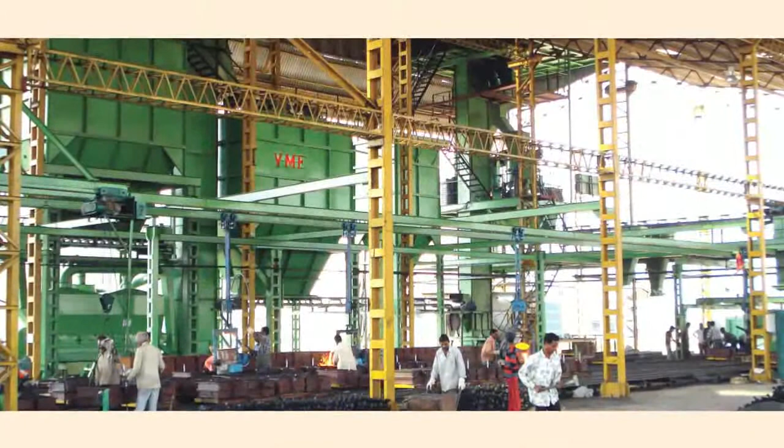VME offers integrated solutions tailored to the business and market requirements of our customers in foundry planning, foundry plant engineering, foundry machines, and shot blast systems.

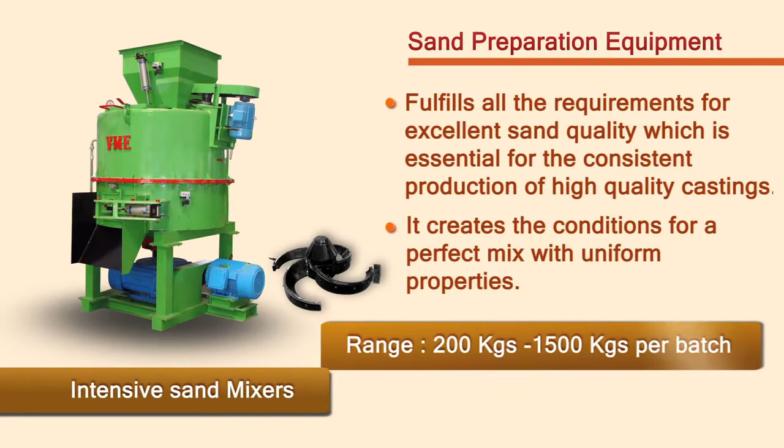VME sand preparation equipment. Intensive sand mixers fulfill all requirements for excellent sand quality, which is essential for the consistent production of high quality casting. It creates the conditions for a perfect mix with uniform properties, with capacities ranging from 200 kg to 1500 kg per batch.

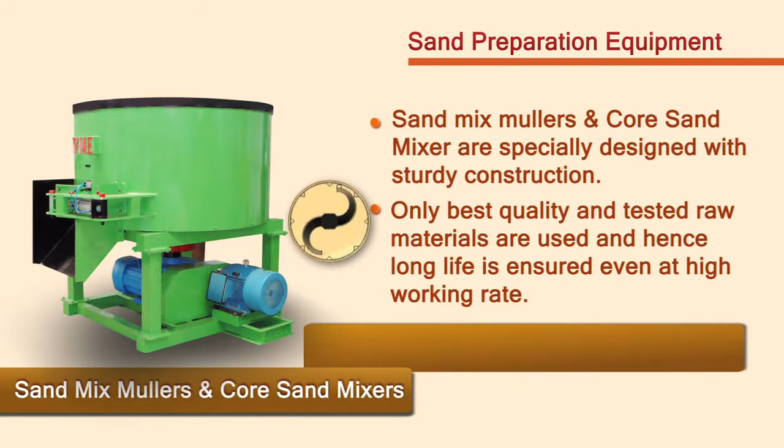Sand mix mullers and core sand mixers are specially designed with sturdy construction. Only best quality and tested raw materials are used, ensuring long life even at high working rate, with capacities ranging from 100 kg to 1500 kg per batch.

Fluidized bed cooler classifier. VME fluidized bed cooler classifier employs a unique fluid bed technology to cool green sand, ensuring dust-free constant temperature of return sand, ranging from 10 ton to 60 tons per hour.

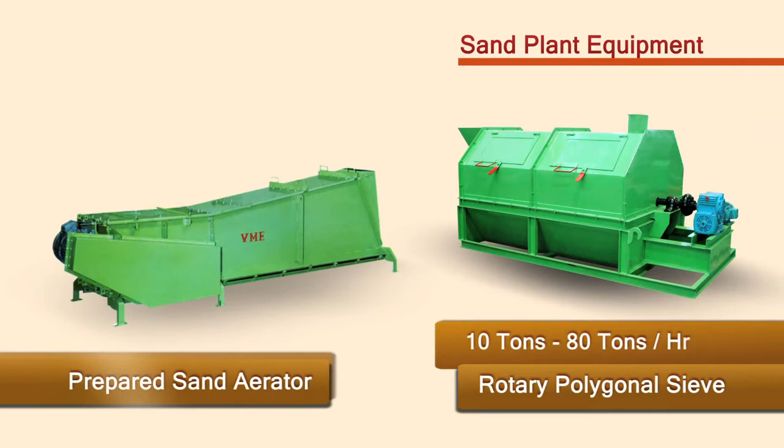Sand dryer, ranging from 1 ton to 5 tons per hour. VME sand plant equipment rotary polygonal sieve, ranging from 10 ton to 80 tons per hour.

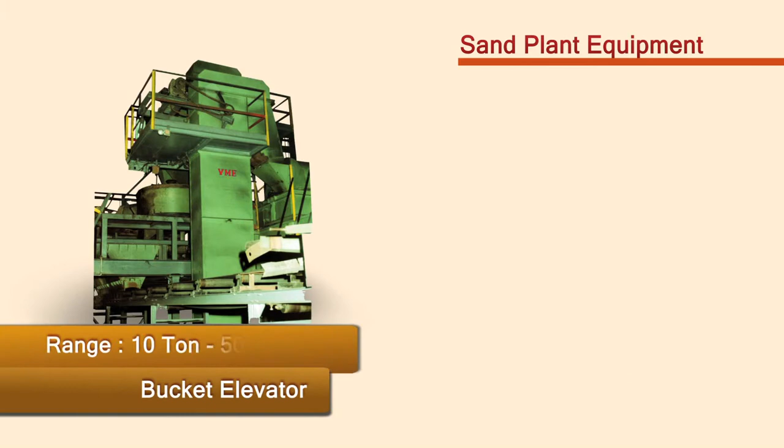Prepared sand aerator. Belt conveyors feeding to sand supply unit. Return sand disintegrator.

Bucket elevator for customized solutions, ranging from 10 ton to 50 tons per hour. Vibratory conveyor, ranging from 10 ton to 50 tons per hour.

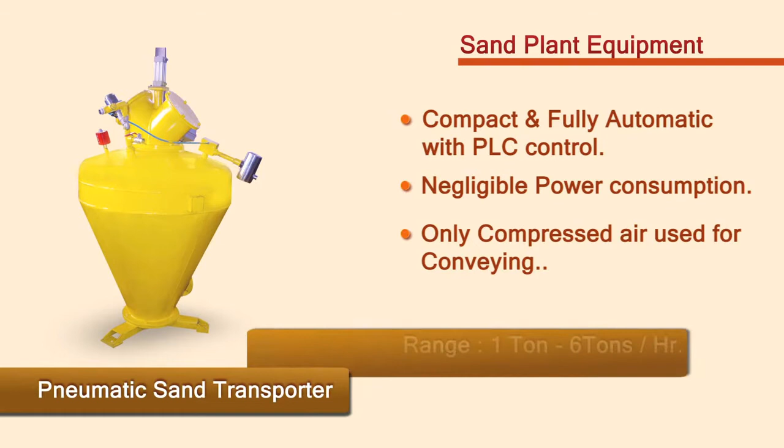Pneumatic sand transporter, compact and fully automatic with PLC control. Negligible power consumption, only compressed air used for conveying, ranging from 1 ton to 6 tons per hour.

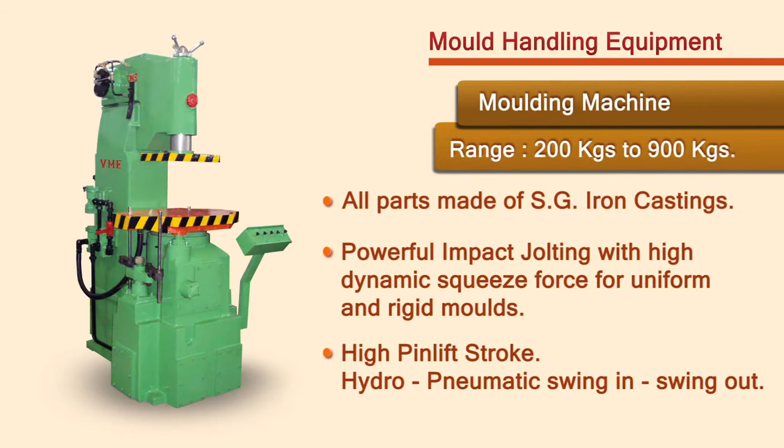VME's mold handling equipment. Molding machine: all parts are made of SG iron casting, with powerful impact jolting and high dynamic squeeze force for uniform and rigid mold, high pin lift stroke, and hydropneumatic swing in, swing out.

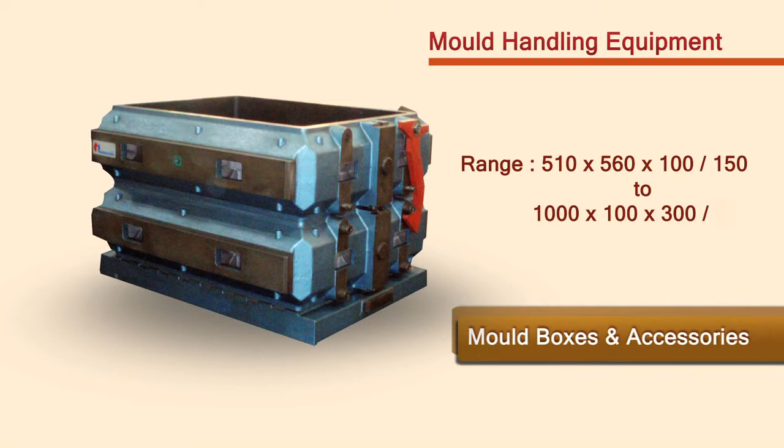Range starting from 200 kg to 900 kg capacity. Mechanized mold handling system.

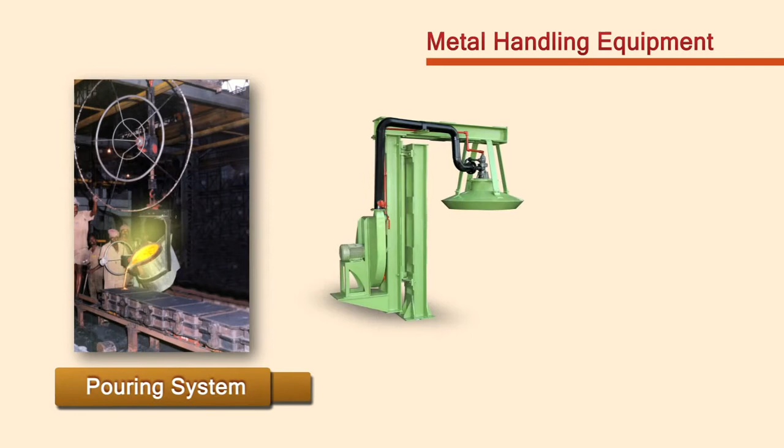Roller conveyor system. Mechanized punch-out system. Mold boxes and accessories.

VME's metal handling equipment: mechanized pouring system, ladle preheater as per customer requirements, and bottom pouring ladle.

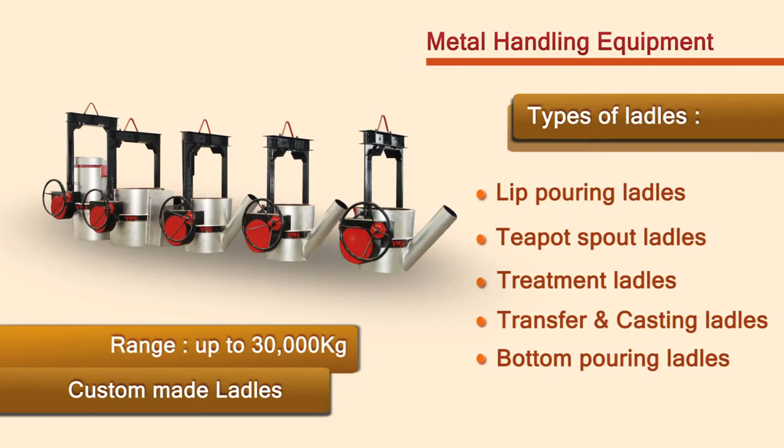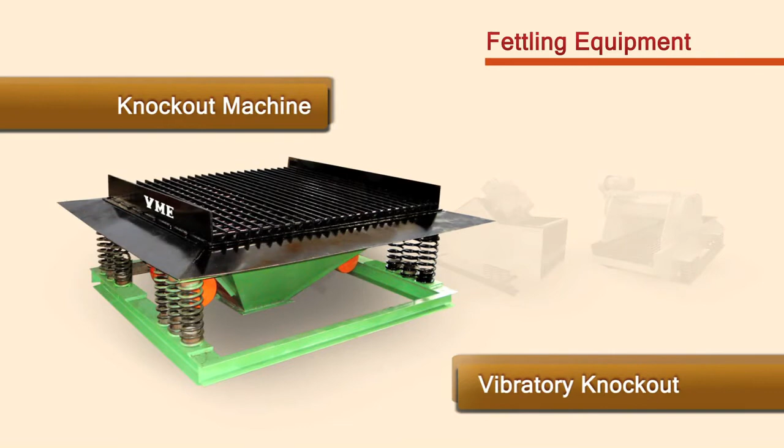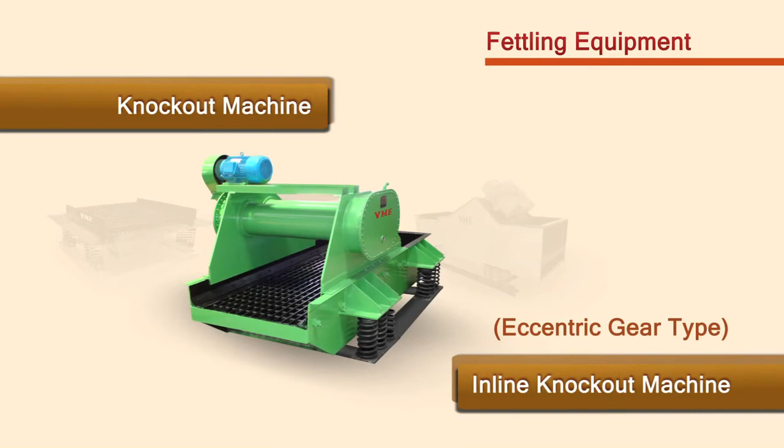Custom made ladles, various types: lip pouring ladles, teapot spout ladles, treatment ladles for the production of ductile SG iron, transfer and casting ladles, and bottom pouring ladles.

Range up to 30,000 kgs.

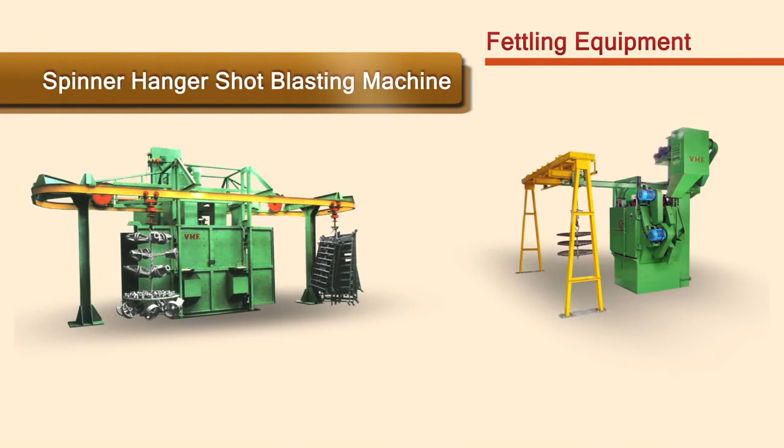VME's fettling equipment: knockout machine, vibratory knockout machine up to 20,000 kgs, inline knockout machine vibratory motor type, and inline knockout machine eccentric gear type, ranging from 500 kgs to 20,000 kg capacity as standard.

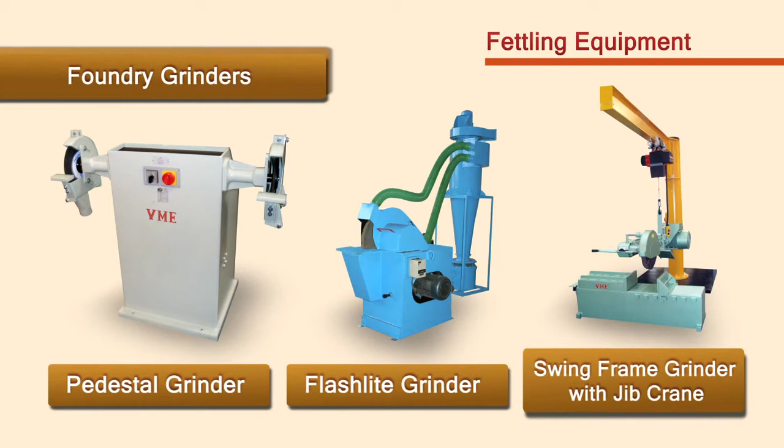Spinner hanger shot blasting machine. VME spinner hanger rotoblast cleaning machine is specifically suitable for surface treatment and desanding of castings, descaling of forgings, and deburring of aluminium parts, with range starting from 300 kgs to 500 kgs.

Range starting from 300 kgs to 15,000 kgs. Foundry grinders: pedestal grinder, flashlite grinder, swing frame pedestal grinder, and grinder with jib crane.

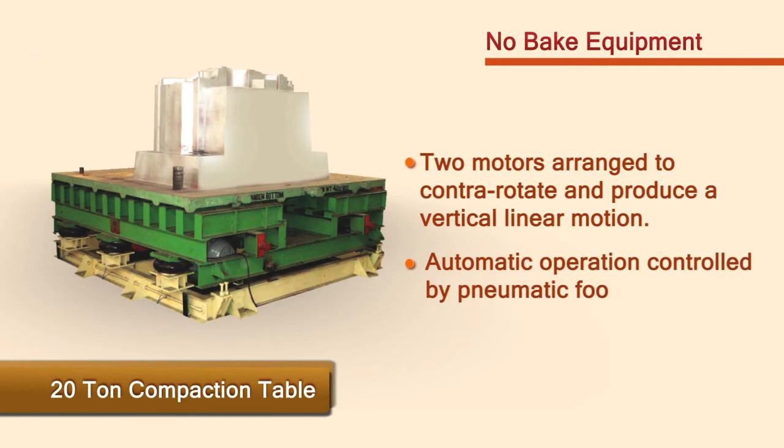VME's no-bake division for chemically bonded sand systems. No-bake equipment.

Continuous mixer: 10 tons per hour single arm, double arm 20 tons per hour articulated type, and double arm 10 tons per hour articulated type.

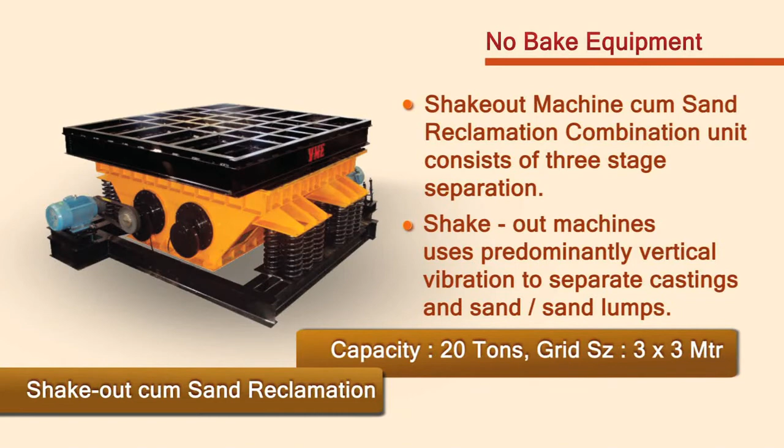20-ton compaction table. Two motors arranged in contra-rotation produce a vertical linear motion, with automatic operation controlled by pneumatic foot switch.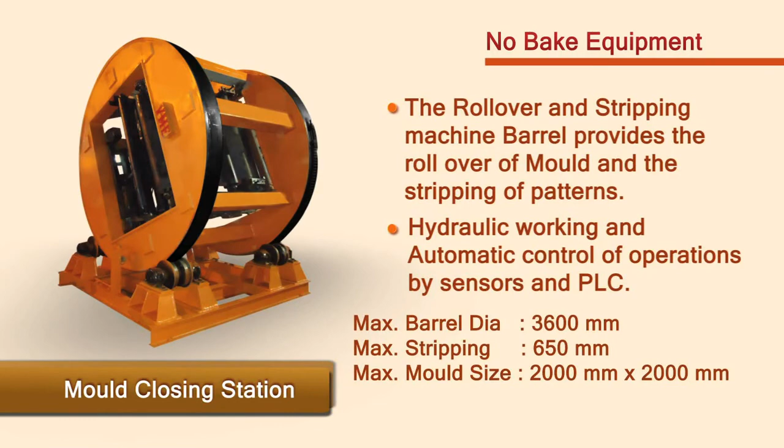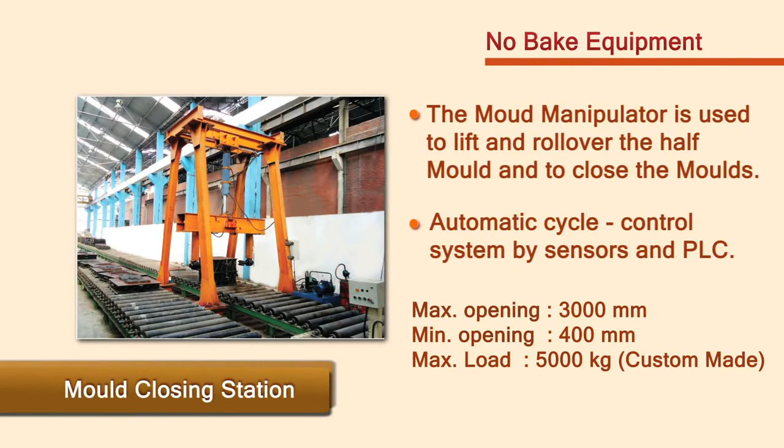Rollover stripping machine: the rollover and stripping machine barrel provides the rollover of the mold and the stripping of patterns, with hydraulic working and automatic control of operations by sensor and PLC.

Mold closing station: the mold manipulator is used to lift and roll over the half mold and to close the molds, with automatic cycle and control system by sensor and PLC.

Pollution control equipment: motorized cassette filter operates fully automatically with reverse air cleaning system. This custom-made filter allows economic operation with a constantly low filter differential pressure.